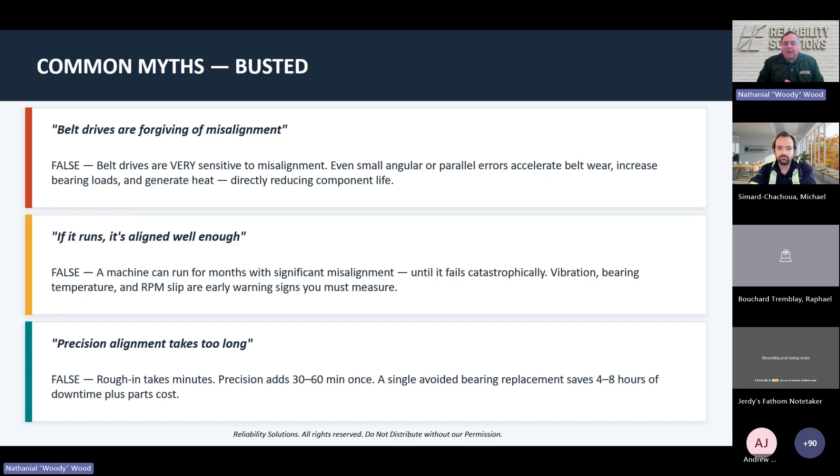The simple fact is, if you start doing precision maintenance across your facility, you're actually going to get faster at maintenance events, not take longer. Once those machines go into a precision state, they're easier to work on when they do require a maintenance event. And if we can save 4 to 8 hours of downtime plus the parts cost, that extra 30 to 60 minutes to put a machine into a precision state is well worth the time.

So what does a bearing failure actually cost? Anybody on this call will look at this and think these are pretty conservative numbers. Oftentimes we think about the cost of the bearing at $600 to $2,500—that's average for a bearing, definitely not on the high end by any stretch. Labor, I've got 8 to 16 man hours in there, accounting for 4 to 8 hours of production downtime and 4 to 8 hours of time to work on it, with a 2-man crew working on this maintenance event at minimum. So now we're looking at 8 to 16 man hours.

Production downtime, if it took our production down, is 4 to 8 hours, and we'll talk about that. Collateral damage: when that bearing goes out, it often takes a lot of other things with it—a mechanical seal, depending on how bad it is the impeller, housings—and worst case scenario it becomes a safety event. So as that bearing goes out, you don't really know what other parts it's going to take.

And we all know that everybody will get that next part to us overnight if we pay enough. One story I tell in class is about a facility that paid $2,000 more to transport a bearing overnight than the bearing itself cost. The bearing was $8,000, their hot shot fee was $10,000, and they were happy to pay it.

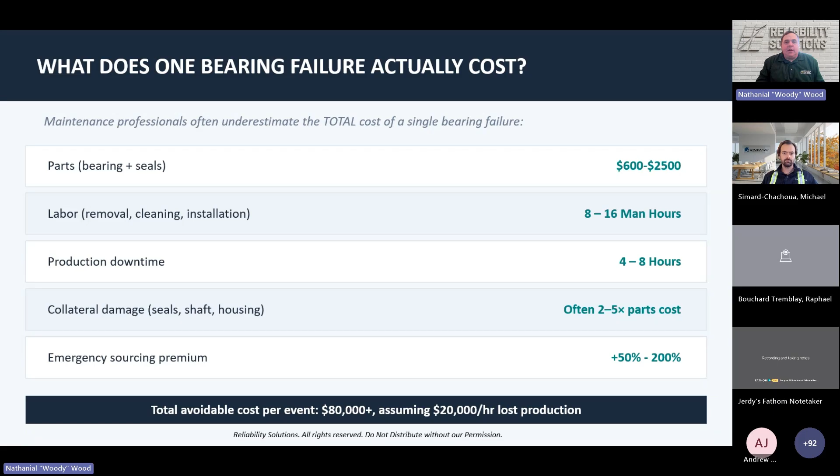But if they had done that as a planned maintenance event and had been able to forecast that bearing failure, or better yet, had installed it in a better state and never had the bearing failure, that would have saved a lot of money. Total avoidable cost per event is 80,000 plus, assuming $20,000 an hour in lost production, with only 4 hours of downtime. $80,000, I think, is certainly a realistic number.

It can be much more or less, but that's pretty accurate. So what are our most costly installation mistakes? What can we do right here, right now, while we're out working on a machine, without doing a precision installation? What assembly errors can we fix?

When I walk through facilities, I see machines, and that's what I do. Every place I go offers a tour, and I take every one I can get. As I'm walking through, I'm looking at the state of their facility so I can speak to the state of their machines in class that week. So if you look at this picture, you can start to see some concerns. Take a few seconds and look at it and think about what's wrong here. Is it good enough, all put together, or do I see some issues? Erwan, if you could trigger the poll for me, we'll talk about that.

The parts are loosened. Base bolts are totally loosened, and the shims we see are also all misaligned. So it's a major problem where it starts. Basically, this looseness causes misalignment and any kind of imbalance, which we can test during condition monitoring. It's not that bad yet, but it's already starting to cause the problem. So basically, it's a very common case.

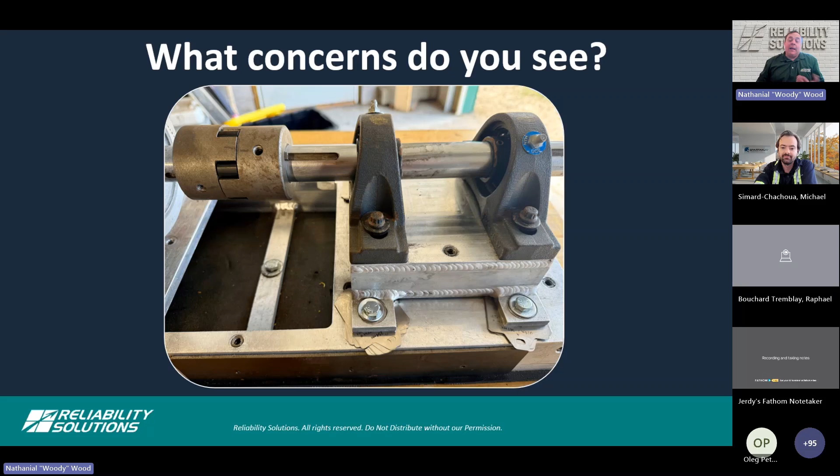Yep, that's a good point, Gene. There is a missing cover on both of those zerk fittings. But those assemblies, that squishy foot, that improper key, that improper hardware, not only are we going to have them fix that in class, we're going to have them take vibration readings between each repair so they can see what benefits they got from that. So we get to drive home that kind of, well, it's always been like that, and say, well, we can do better and prove that better actually helps out, right?

So mistake number one, soft foot. Soft foot is, I go to my favorite sports bar. The Green Bay Packers are playing, and since I live in the Upper Peninsula of Michigan, I'm required by law to root for the Packers, not the Detroit Lions. So I go to my favorite sports bar, I'm there with my 19-year-old son. He can't drink anyhow, I brought him so he can drive me home.

We put our hands down on that high top table. The whole table tips towards me. So I look at my boy and I say, put your elbows on that table and don't move them until the game's over. That way it won't rock back and forth. That's a great solution when you have a 19-year-old son who can just hold the table down for you.

Not such a great idea with our machines. Part of the problem with our machines is we look at them and see that soft foot, but we go, okay, when I torque this bolt down, it's going to pull that foot down to the base, and we don't have this problem. That's true. What it does is it distorts the case, right? You can actually hear that case distortion with a vibe pen or a Monarch examiner. You can loosen the bolt that has the soft foot, and you can hear that distortion go away during a running soft foot check. So that's huge, we've got to fix that short leg soft foot.

After we fix short leg soft foot, we can fix angular when the machine's in very close proximity to its final resting place. That third one, that squishy foot, we got to do the thing that all of us mechanics hate to do, we might have to clean something. Squishy foot is due to the rust, the corrosion, the product adherence to the bottom of the feet. Oftentimes I'll hear, well, Woody, we didn't move the motor because we just changed the pump. Right, but how are we going to do a precision alignment on the pump and motor combination if we don't fix the problems underneath the feet of the motor?

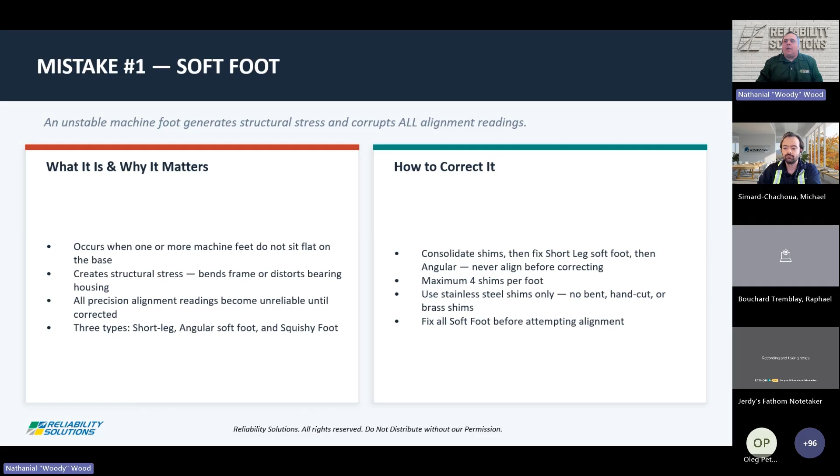If we don't, what happens is we'll get very close to our final alignment and start playing that back and forth game. Add a little shim here, take that shim back out, add a little back in, take a little back out. We're just real close, but we can't quite get there. A lot of times that's unresolved soft foot.

So another big one is incorrect fits and improperly installed keys. I teach these classes a lot, and the number of people that are miking shafts and bearings to make sure that shaft and bearing can live together is very rare in today's industries. You just don't see it a lot.

A lot of folks aren't comfortable with a micrometer and don't really understand how critically important these measurements are. So if they are measuring, they're measuring with a digital caliper, which is only accurate to the thousandth. Yet we've got bearing books that want us to measure tolerances into the 10,000th, because you might have 6 to 8 10,000ths to play with. So we're going to cover that.

Taper locks should be 80% contact between the shaft and the bushing bore, and they should never be lubricated. That's another one we see quite a bit - well, what do we lubricate all our shafts in taper locks? Yep, and we lubricate them probably to make it easier to take them apart. And the answer to that is, yeah, that's why we do it.

When we start talking about how to correctly install a sheave and why it's important not to use lubricant, it can cause the hub to break or the hardware to break. Also, we're not getting that grip like we're looking for when we put lubricant in there. So one of the things we can do if we're worried about taking it back apart is we can verify that shaft surface finish and verify the fit tolerance to make sure that's all going to go together.

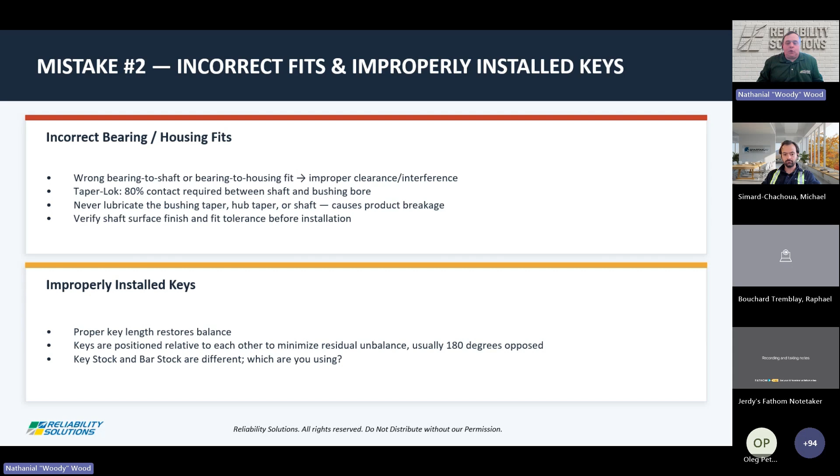Torque values. This is another huge one. This is such a common mistake. As an aircraft mechanic, I grew up with torque wrenches being the name of the game. There's no reason you were ever allowed to not use them. We use them on everything.

However, I didn't really understand the reason behind using them. I just knew that I had to use them. And there's kind of this recurring thought in industry today that if I get it tight enough and I don't rip the head off the bolt or rip the threads out of the hole, then it's probably fine. As long as I got to my torque factor and don't break anything, I'll be okay.

Well, over torquing can stretch that bolt into the plastic range. And if you read that bottom bullet in the red highlighted block, it says a bolt stretched into the plastic range can vibrate loose over time.

Of course, you look at the under-torque effects on the right-hand side, that bottom bullet says bolts without sufficient tension can vibrate loose over time. And we see that also often. Hey, that bolt's loose, it vibrated loose, go tighten it up more.

Well, if it's already been stretched into the plastic range and permanently deformed, you can continue to do that as much as you want, but that bolt is already in the plastic range and is not going to deliver the clamping force it's supposed to.

So that's why torque wrenches become so important. One of the things I recommend is if we're using hardware that's less than 1 inch in diameter, make it one-time use. That hardware is easier to over torque, easier to stretch into the plastic range just because it's smaller hardware.

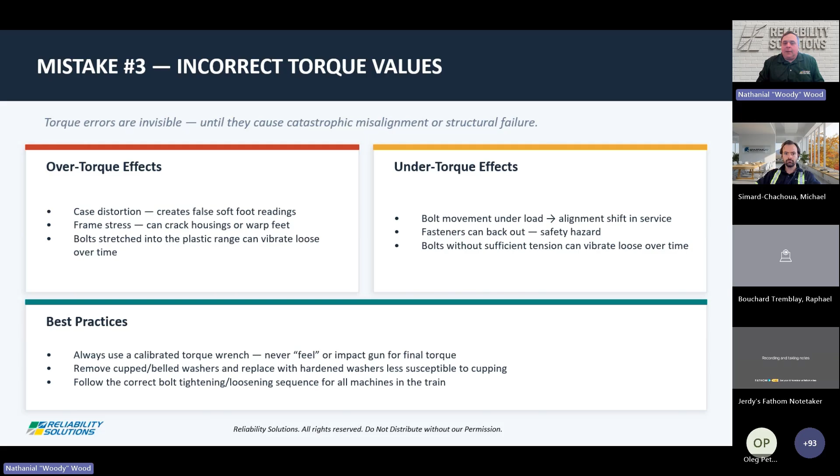So Nathan, somebody pointed out, what about lube on bolts prior to torque? Yeah, I see Matt's question. Great one. Yes, lube them please, especially if they're stainless steel. That stainless steel is susceptible to cold welding or galling. One way we can prevent that is lubricant. The other way is correct torque.

However, if we're going to lubricate bolts prior to torquing, we must account for that reduction in torque setting. Pocket reference books, there's friction coefficients all over the internet. They're covered in our textbooks and in the pocket reference book we hand out. I know iEngineer is an app I keep on my phone. If you have an iPhone, it's a pretty handy, rough guess.

It's not exact, but we do need to change our torque setting on our torque wrench when we're going to use lubricant, generally by about 25%. But each lubricant's got a different torque setting. So what happens is if we use anti-seize or lubricant on a piece of hardware but have it set to the dry torque, we will overstretch that bolt.

In some of our classes, we actually use a Skidmore-Wilhelm unit to show that bolt tension, and show once that bolt's been stretched into the plastic range, there's no getting it back to doing its job correctly. So yes, 100% use lube on the bolts, but we have to account for that lube when doing our torque settings. Hope that answers your question, Matt.

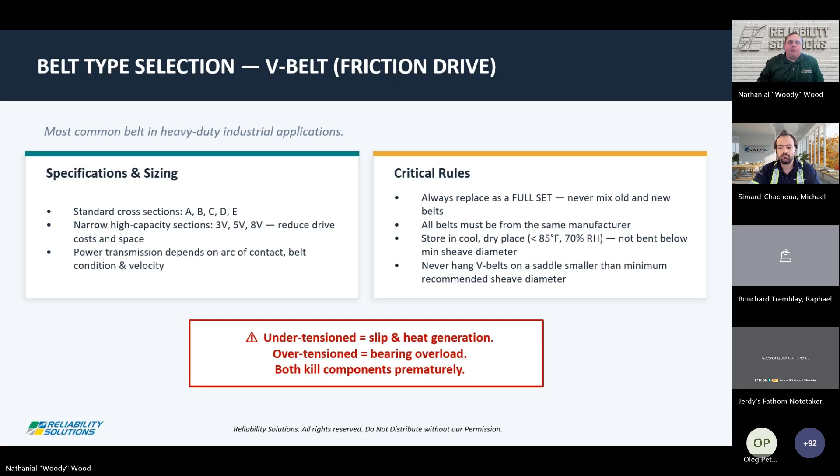Sheave diameter impact on bearing and belt life. This is one of those things I wanted to talk about. When we talk about these belts, doubling the load on a bearing gives 1/8 the life. It's a cubic law, 2 to the 3rd power. If we triple the load on a bearing, it's 1/27 the life. We can carry this out wherever we want to go. Quadruple the load on a bearing, and we're at 1/64 the life. So now we can start to see where we're getting 11 to 22 year bearings only lasting 3 to 6 months.

So one of the ways we can reduce load on that bearing is to go to larger sheaves. Larger sheaves will allow us to reduce the heat and the stress on the belt, and we can lower our horsepower. The belt capacity works better.

When we do that, we've got to pay attention to the feet per minute of our sheaves. We can overspeed sheaves, especially on a 3,600 RPM machine. That's one of the things we discuss in class, the thought process behind it, along with some math formulas on how to make sure you're not. But if you're using something like Gates Design Flex Pro or Continental Make Power, it will tell you it's an unsafe configuration as you try to increase the size of those sheaves.

Reducing that bearing load and reducing those temperatures results in a direct increase in your machine life, but it also lowers your electrical consumption.

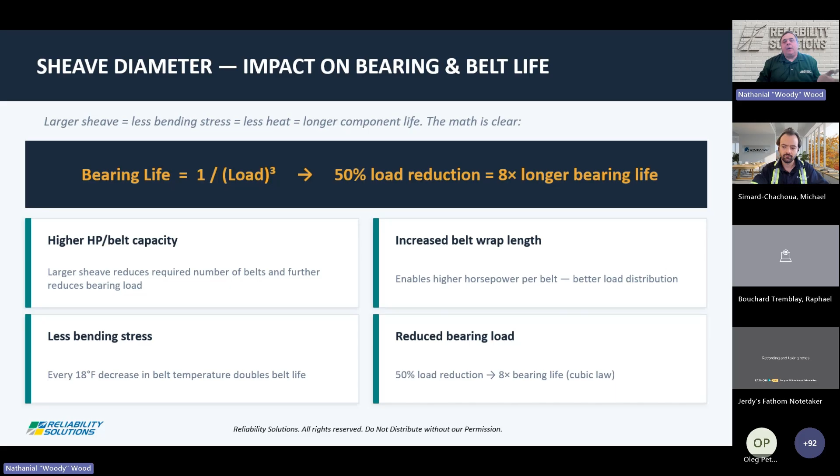Pulley installation, this is kind of generic pulley installation. What we need to do is have all the surfaces clean. That's the first mistake I see. Instead of cleaning those surfaces, we just slab them with anti-seize, so hopefully it'll come off the next time.

The insert, so we're going to make sure that we put that hub into the pulley in such a way that the install holes are lined up with the install holes, and the removal holes are lined up with the blank space on the pulley. Anti-seize is the enemy, we've already talked about that.

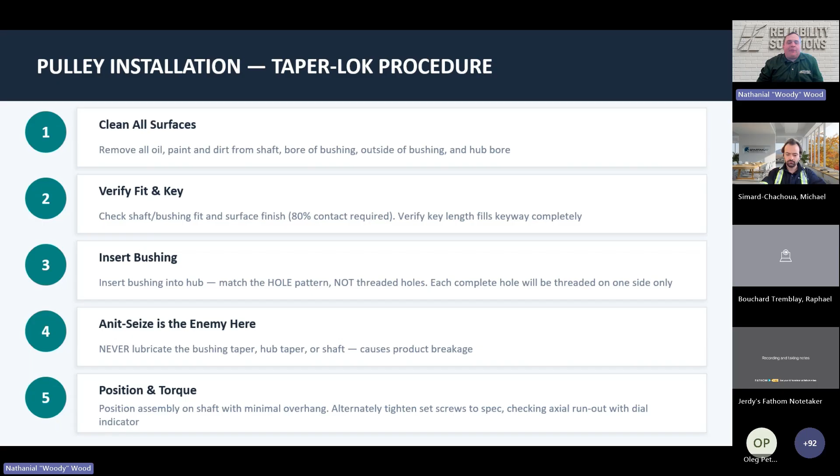We want to position that pulley as close to the drive end as we can, as close to that bearing as we can. The example I use in class: I'll have the guy that goes to the gym every day after work stand up. I usually give him a gallon jug or a 2-liter pop bottle to hold out in front of him, and I'll let him just stand there as we talk through overhung loads. After I notice that rotator cuff starting to burn a little bit, I'll ask him if he'd like to move where he holds that to, and invariably he'll bring it back in closer to his shoulder. That's kind of how we drive home that the weight hanging out at the end of that shaft is doing the same thing to your bearings that it's doing to that shoulder.

Pulley alignment checks in a belt drive. We can have a parallel or an angular gap. I will tell you that normally we have a little bit of both. We can use a straight edge to get rid of that parallel gap or that angular gap, a horizontal angular gap, and we'll do it in class.

We'll do it with a piece of string or a straight edge, or sometimes we'll let them use both, depending on which one they're more familiar with. And we will get just an absolutely beautiful alignment. But what they'll miss is the vertical alignment between the driver and driven.

So then we'll kind of capture that back with the laser, and we'll talk about a belt hog. We use belt hogs in class, and we use the belt alignment tool, the BAT, if you're familiar with that one. We'll use that to find the remaining parallel and horizontal angular, but you can also find the vertical angular with it.

The big thing is, if it's a synchronous belt, watch where that belt's running on the sprocket. When you start that belt up, if it's running down the center of that sprocket, it's probably pretty well aligned. But if it's off to one side or the other, that's telling you you've got some misalignment.

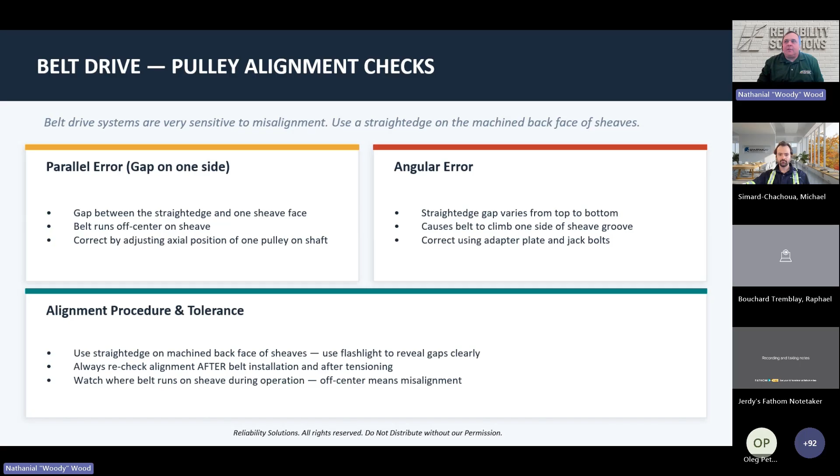Belt installation, this is another huge one that we see. Our mechanics do not want to slack the machines. They like to take and cut the old belt off, or roll it off using a screwdriver, and then put the new one back on.

So they'll take that belt, put it over the small side, usually the driver pulley. They'll hang it over that driven pulley, put a screwdriver under it, and roll it over. That breaks and damages those tensile cords, and it also cuts that rubber coating.

This is our recommended procedure to prevent that. We need to reduce that center distance first. We need to slide that motor as close to that driven machine as we can. Then we need to put the belt on carefully. For a synchronous belt, we need to make sure the teeth are fitting in the grooves of both pulleys. For a V belt, we need to make sure that it's sitting in there correctly. That usually does it by itself.

Then we start to extend that motor back away from that driven machine, whether it's stacked on top, side by side, whatever that may be. We start taking that up. And I can check my alignment with some of these alignment lasers while I'm doing that. So as I'm tensioning that belt, I'm setting my alignment to where I want it to be.

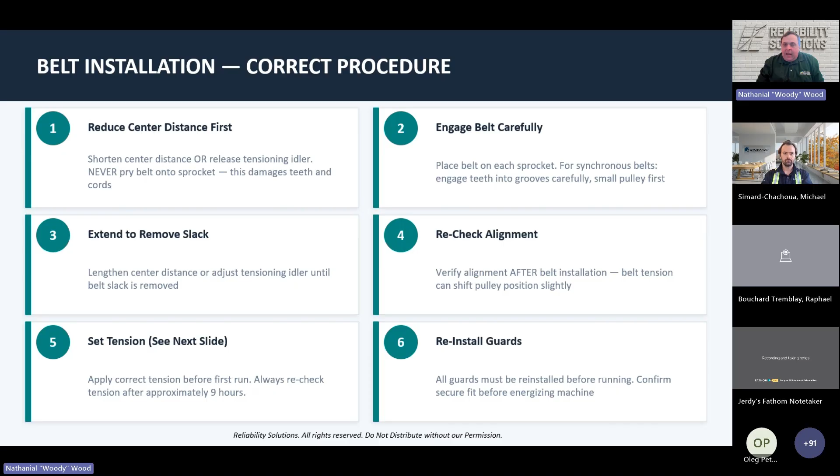Then I'm going to set my tension, and we're going to talk about some ways to set tension on the next slide, but that's going to be critical. And number 6, we're going to put the guards back on and run it, and we'll talk about some things we can do after we start running it.

So what I correlate this one to, and this is my little good, better, best, is when we used to go into Best Buy in the 90s and early 2000s and buy a TV. You'd walk in, there'd be a guy in there in a blue shirt that said Best Buy, and you'd tell them you're there to buy a TV, and they'd say, do you want a good TV, a better TV, or the best TV we sell? And they were laid out on the wall in that manner. You'd go, oh, well, I want the best TV. You'd walk down to the best TV and be like, well, maybe I don't want the best TV, that's a little more than I wanted to spend. Let's look at those better TVs, right?

So it's the same thing here. What are we going to do? With the calibrated eyeball, and this is what most of your folks are doing right now, this is what's happening in the field, most common. They've all got a way, well, if I can squish it an inch, if I can turn it 90 degrees, all these different methods to try to figure out belt tension. But the number 1 rule of the calibrated eyeball is: when the time exists, tension the belt correctly.

So if I'm going to go back and tension the belt correctly, I could just use a force deflection meter and tension it correctly at that time. That's going to go back to following that manufacturer's data, understanding that little card or the box the belt comes in gives you a belt tension. That gives you the belt tension for that belt at max horsepower, not necessarily the horsepower you're transmitting with the belt. Whereas Gates Design Flex Pro, Continental Make Power, all the manufacturers in the industry have their own app that will tell you, hey, I have this size machine running this horsepower, this speed, this diameter of pulleys, this much centerline distance, and it will dictate the belt tension based on the horsepower that's being transmitted. So you're not overloading the bearings in that motor.

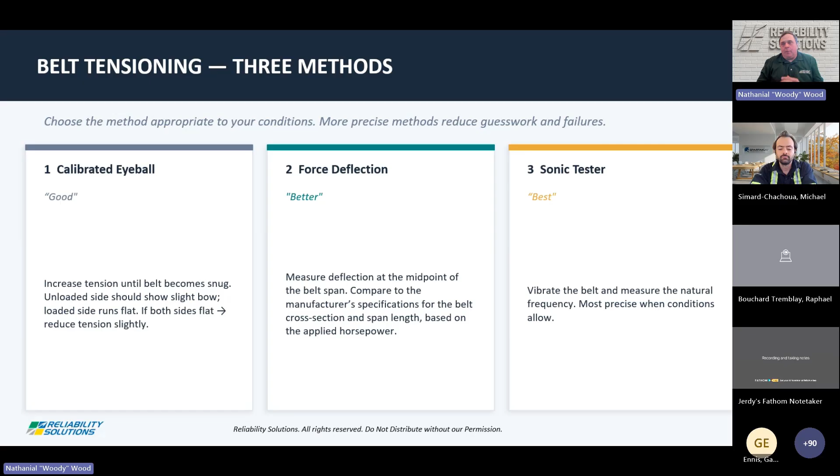But when we get to a V belt, we get a really cool ability. We get the ability to check belt tension while it's running. We get the ability to do in-service belt tension checks to make sure we're not overloading our bearings, to make sure we're not wasting electricity, and to make sure we're not damaging the belts and the pulleys, using a strobe light. We can use that strobe light to calculate our theoretical RPM.

We're going to calculate our theoretical RPM based on the diameter of the driver and driven. Once we have our theoretical RPM, we're going to get the speed of our driver, and we're going to compare it to the speed of our driven, and compare all of that to the theoretical speed of the driven.

If we have 2% slip down to 0.5% slip in a V-belt configuration, that's normal and we're okay with that. At 4%, we're starting to cause damage to the belt, we're starting to cause damage to the pulleys, and we're wasting electricity. We're slipping at a rate that we're wasting mechanical power that we've already paid for.

At 6% slip, the tension factor has really gone down. This is one of those things where at 6% slip, we're damaging machines and going into some serious problems with our electricity consumption.

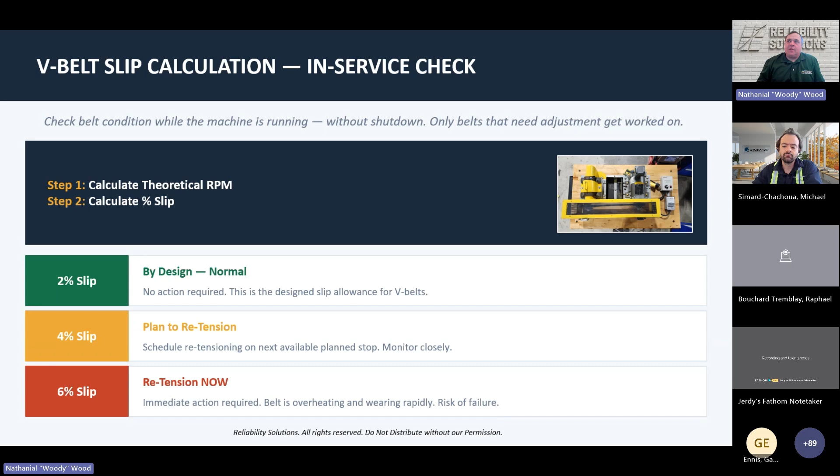So with a V belt, whatever your belt tension method is, I would put a PM into effect where I can adjust that on the fly, or I can check that on the fly. Belt storage practice, we already talked about.

Nathan, someone's asking if the methods you're showing regarding V belts apply equally to serpentine belts, or should we be treating them differently? Talking serpentine belts like in an automobile? Yes, sir.

That's a great question. I've never worked the slip on the front end of my truck. Certainly a synchronous belt, it's not going to apply to—that should be 1-to-1. I would have to research that, Matt. I don't deal with enough serpentine belts in industry that I could look into that. I will make sure we get you an answer on belt slip via serpentine belts. I would think those should probably slip a little bit—that's part of the safety factor of them, to make sure they're not taking out other equipment. But I don't know if the 2% number is the same, so I'll have to follow up with that one. Thank you. Yep.

So belt storage best practices, we kind of talked about this. We want to be less than 85°F, less than 70% relative humidity, no direct sunlight, get them out of the windows. We talked about the saddle diameter. One of the ways we can increase that saddle diameter very easily: go get a piece of 6-inch PVC pipe, cut it the length of that rod you're already hanging those belts on, and just put that PVC pipe over that rod. Now you have a 6-inch saddle diameter, and that can help save your belts without spending a whole bunch of money in your storeroom.

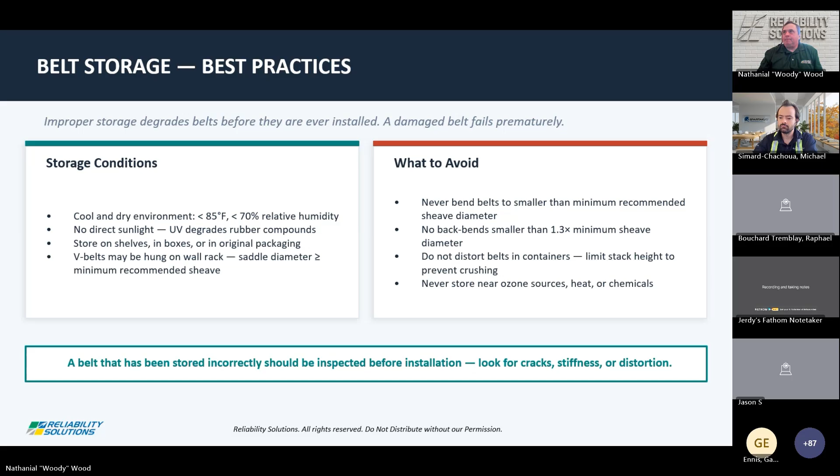All right, so precision shaft alignment. This is very eye-opening in class. We're trying to get the center line of two shafts collinear when viewed from any angle during normal operating conditions.

Whenever we do a rough-in inspection or a rough-in alignment with a straight edge or something like that, we're aligning the outside of the couplings. When we align the outside of the couplings, it causes a little bit of problems because those couplings aren't always true—they've got some run out to them. So we use a laser and reverse dials to try to align the center of the shafts, and that's going to protect our bearings a little better.

We've got to align it cold in such a way that we account for that thermal growth. And once again, there's two types of alignment: angular misalignment and parallel misalignment, just like we did in belt drive. With that, we're going to find that most have a little bit of both, and they're going to have it in both directions, both vertical and horizontal.

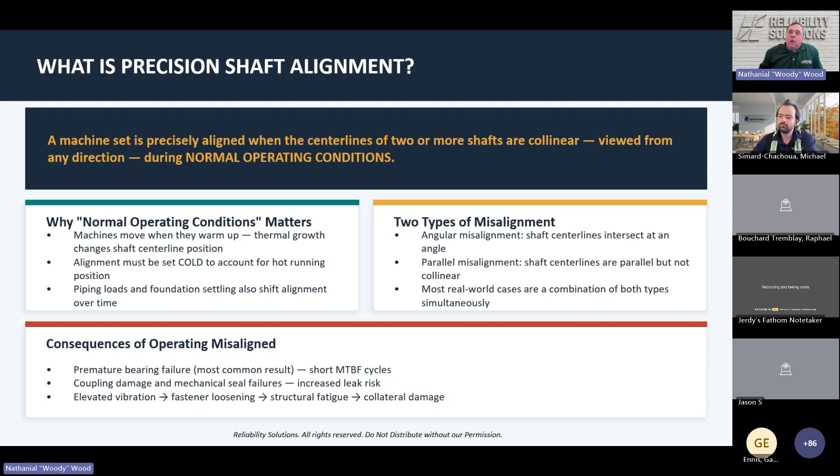So we'll talk about some shaft alignment. Step one, we're going to have the same pre-alignment checks, right? We've got to get all these assembly errors corrected before we go too far down the alignment process, or else we just start going back and forth.

So we need to get that short leg removed. We need to get all that squishy foot removed, that extra debris that's under there, the extra shims. Get them less than 4. Check the coupling. Do we have the correct key length? Do we have the couplings oriented to each other correctly? Do we have a correct gap between the coupling?

We can check our bearing condition by doing a lift check and a run out check. Before we shut a machine down that's running, if we're going to work on something that's already in operation, we should take a set of as-found readings. They're the baseline that proves what we did mattered, and they also are how we can prove that we've lowered electrical consumption.

And then once we get that alignment process started, we're going to stop when we're within about 10 mils of the feet being where they're finally going to rest. And that's when we'll correct the angular soft foot.

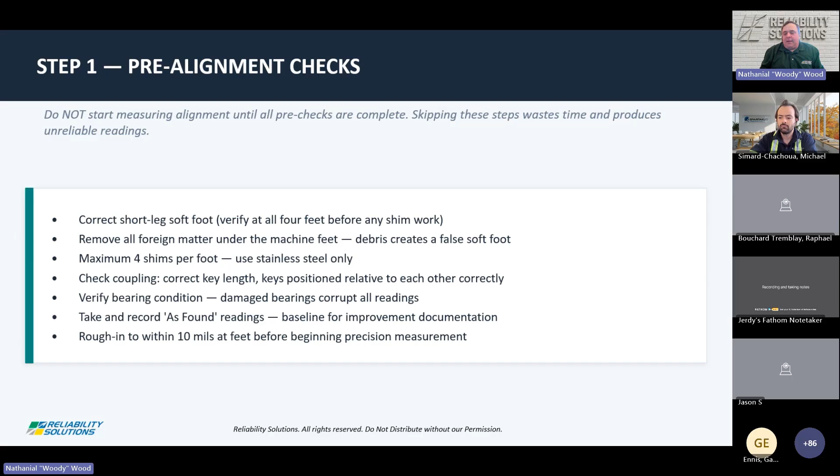And the whole goal of the rough-in is, one, to get the machine into a better state if we're not going to do a precision alignment for whatever reason, and two, it allows the laser or the reverse dials to work correctly. So if we're not roughed in, then when we take those readings on those reverse dials or those lasers, they're so far out that we get an error from the laser alignment.

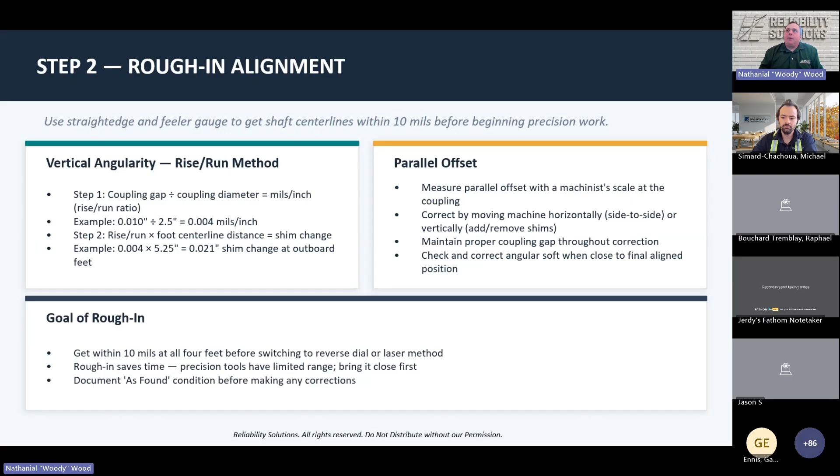So precision alignment methods, the two we talk about the most in class are the reverse dial method. That's the one we'll do in class, and that's really still a great method. A little bit of graph paper and a reverse dial worksheet. For a $1,500 tool, which is what a set of Starrett reverse dials costs right now, I can do the same thing that a laser alignment system does. And in fact, I can do more than some of the cheap laser alignment systems do.

So we'll talk about both of them and kind of where the best method is. I certainly like the laser alignment systems, but if I'm coming out of an outage and the entire world's waiting on a laser alignment system, knowing how to do the reverse dial is pretty handy.

The same thing applies to both methods. We've got to correct the vertical and then the horizontal. And every time we move that machine, we have to remeasure.

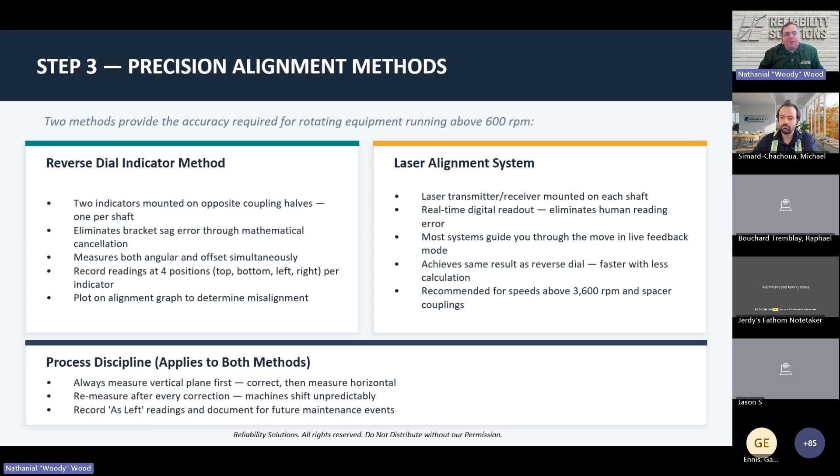Our alignment tolerances by shaft speed, these are very common, these are at the coupling. This is what your laser alignment tool probably tells you to align to. In class we talk about crossing out acceptable and shooting for excellence. But also, if you look at that bottom general rule, for a machine less than 2,000 RPM, if we get every measured location, meaning all 4 feet and the reverse dials mounted to the shaft, within 0.002 of an inch of the cold alignment line, or for a machine greater than 2,000 RPM within 1,000th of an inch, we'll have a much better alignment.

The alignment tolerances you see in that chart are basically at the coupling, but they don't take into account the radial internal clearance left in the bearing. So as a general rule, we're going to try to get anything less than 2,000 RPM within 2,000ths on the same side of the cold alignment line, and greater than 2,000 RPM, we're going to try to get within 1,000 on the same side of the cold alignment line.

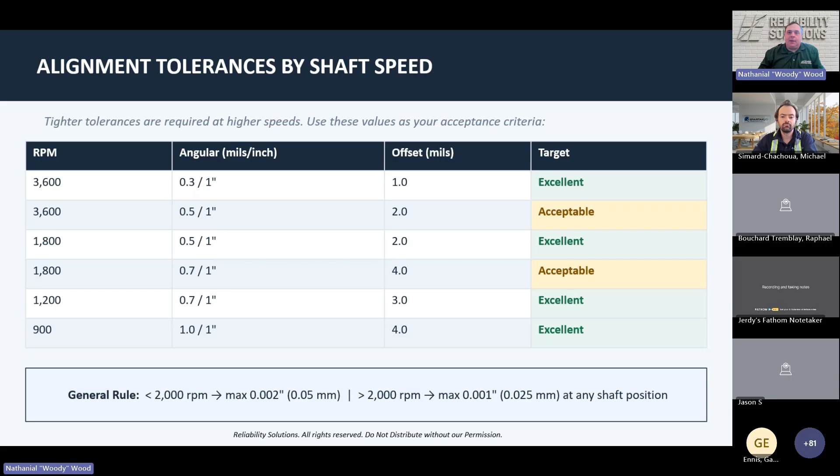Optimum move. This is one of those beautiful things about the reverse dial: when I use the optimum move, I can sometimes make a better move than what the laser shows me. And once I plot this machine out, as you can see the steps here, I can look at my 4 optimum moves and figure out the one that makes the most sense for my unique situation.

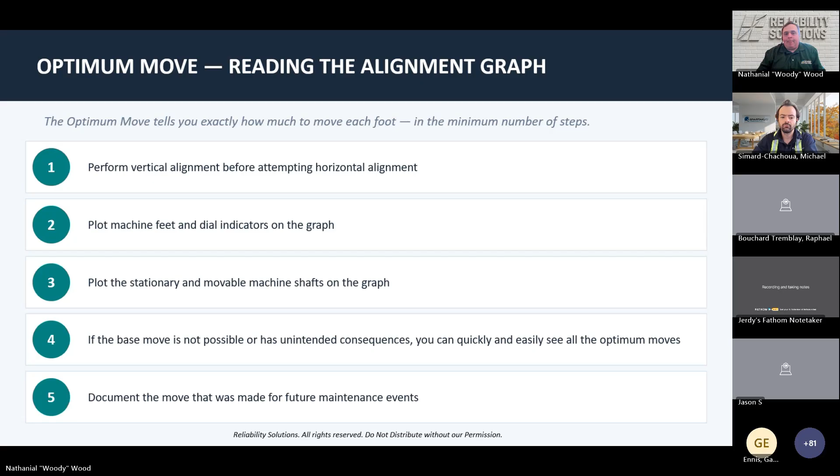Thermal growth. Methods to measure thermal growth are on the left-hand side. We've got Permalign, Dodd bars, ACCU-LIGN, all sorts of optical and laser alignment systems, and they're either expensive, they take a lot of skilled interpretation, or a combination of the two.

Whereas I can take my spot radiometer or my temp gun, as you see in the picture on that slide, I can calculate my expected thermal growth using the actual temperatures that my machine runs at and compare it to the temperatures that it's going to be at when I align it. And I can calculate, based on the coefficient of expansion of that material, exactly how much that machine's going to grow. And then I can offset my machine cold so that it grows into thermal alignment.

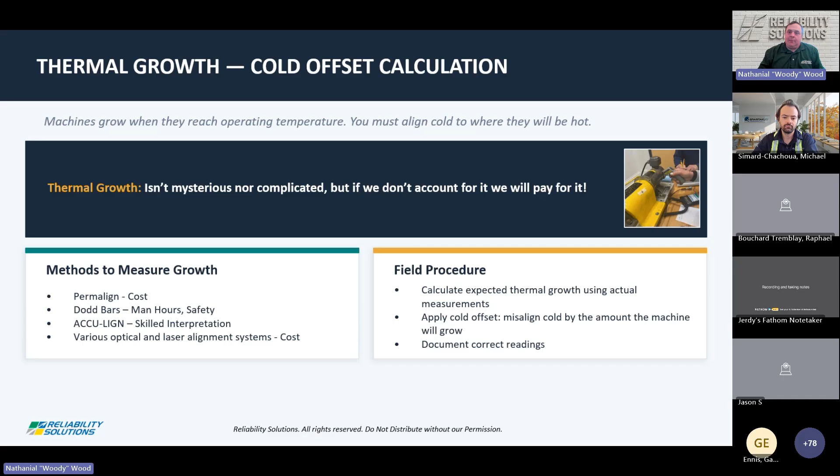Documentation. When we are documenting stuff, it becomes critical that we document it and turn it in, and that gets turned into somebody who does something with it, right?

So for vibration, we're looking for less than 0.05 inches per second peak. For bearing temperature, we're looking for less than 130 degrees. Coupling temperature, the cooler we can get it, the better. The RPM, we're looking for it to be as required, and to bring our amp draw down to get that RPM to where we want it. And that amp reduction is the first time that we can prove what we did mattered. That's the first time we can prove cost savings.

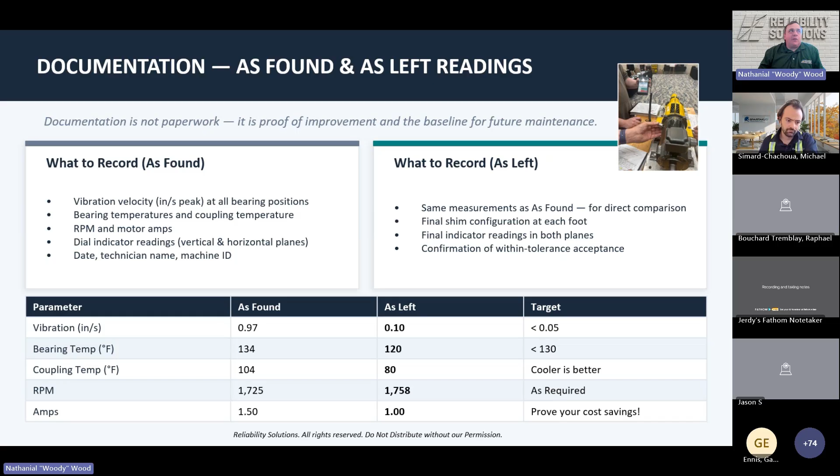Precision alignment, common errors and fixes. If your readings are changing every time you move them, you need to look at loose dials, loose lasers, loose coupling. Something is wrong in our setup. Our feet aren't tightened down, and so we should check all that.

If the machine shifts after tightening, that can be due to some unresolved soft foot, some pipe strain, some lack of torquing, all those, and so we need to look into that. And if you just cannot reach your tolerances at all, that's when we start looking at, okay, what are my base? What are my feet? What's the hardware? Did I change all my hardware? What's the corrosion level on my base?

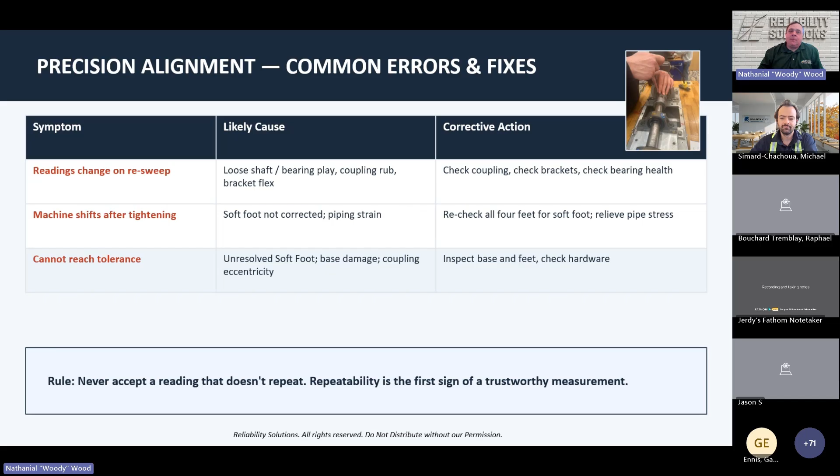So with that said, I'm going to cover the big ones, the takeaways. This is what we've got to have from this 1 hour that I've been here.

So one, we've got to get all the assembly errors corrected before we can attempt a precision alignment. Two, we need to replace all belts as a full set, not one-offs. Taper locks, no anti-seize or lubricant on taper locks. Belt tension, measure it by force deflection or the sonic method, not calibrated eyeball alone. But if it's a V-belt, the belt slip formula is an excellent way to check while it's running.

Number 5, thermal growth is real. We've all aligned a machine where we started it up and it sounded great. And then as soon as we walked away from it, 6 hours later, it sounded like it's coming apart at the teeth. That's thermal growth.

And then number 6, document as found and as left. We have to prove that our machines are getting better. More importantly, we have to be honest with ourselves about what we're doing and that our machines are working the way that we intend them to. And not hiding our mistakes. Let's face our mistakes, put them on documentation so that we can hold ourselves accountable.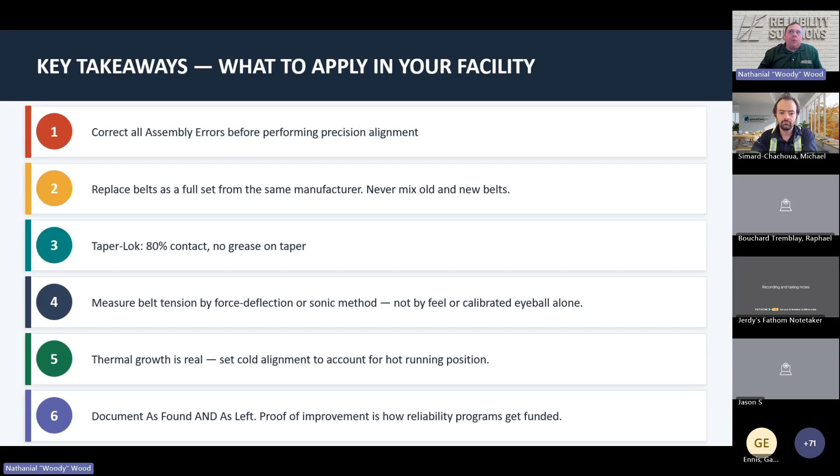And with that, I'll turn it back over to Michael a minute late. Thank you. Yeah, it's always difficult. As I said, there's always a lot of material. It's hard to get it all in 1 hour. I know some of you guys had to leave.